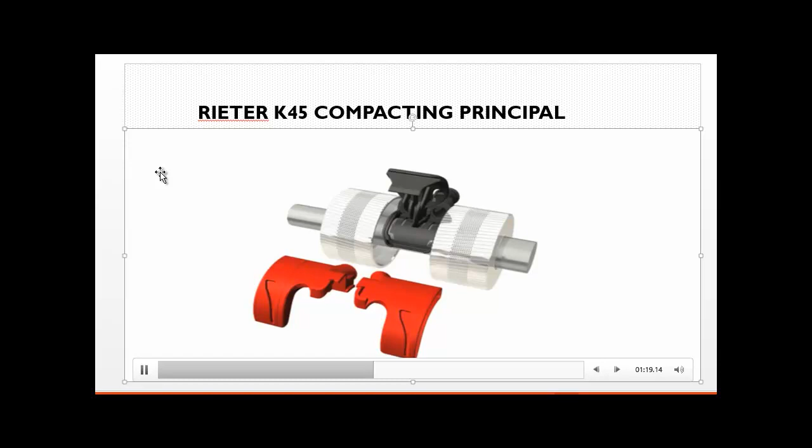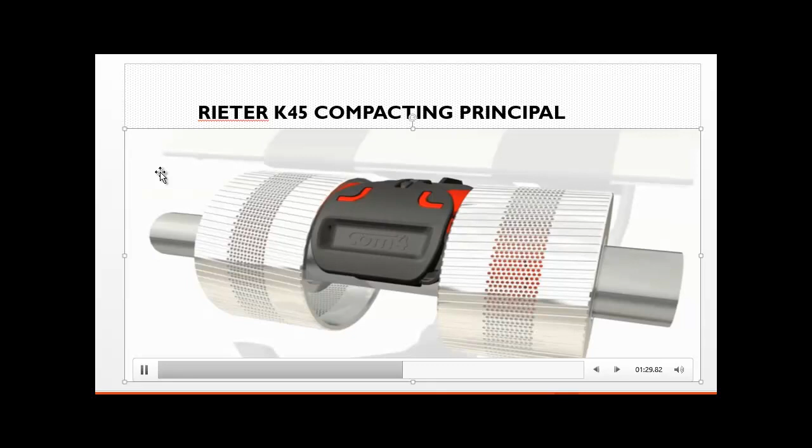Here you can see the air guide element, drafting zone. So here it is very good, the system showing the roving is coming into the drafting zone, and then on the perforated drum you can see here a small fiber is going inside.

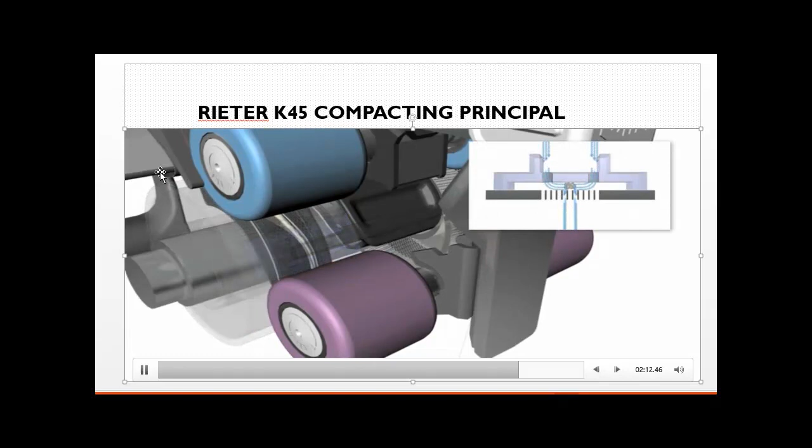Basically, if you can see, the compact yarn disadvantage is the cost is higher for the attachment. Maintenance is required because there is a chance of choking the suction tube, and consumption of energy is higher because of the suction of the fibers. Otherwise, yes, it is an excellent system. Compact yarn is highly used in industry right now, in denim also.

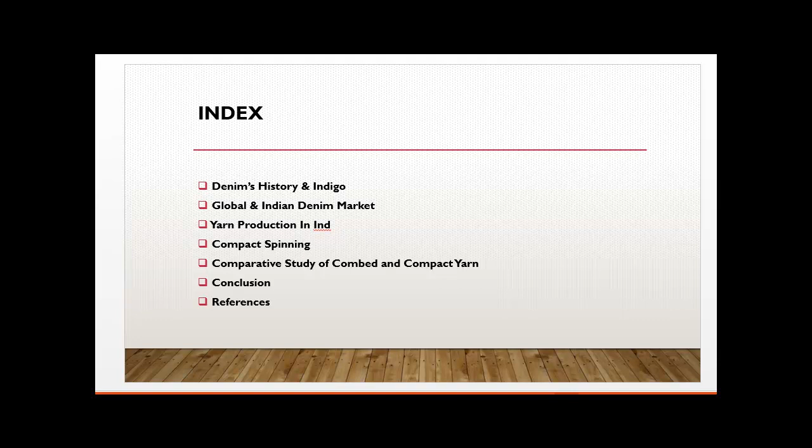Let's first see the denim history and indigo. So I have given here some story for the denim and indigo jeans. The story of jeans began in the mid 19th century simultaneously in two European cities, Nimes in France, where the fabric itself was created, so-called Serge de Nimes, which led to the name of denim. People ask me why the name comes denim - it's because of Serge de Nimes. The name was combined and it became denim.

Genoa in Italy, where the color comes from, called in French bleu de Genes, which led to express blue jeans. The fabric and color came together to become the jeans denim.

Denim is a strong cotton fabric made using a twill weave, which creates a subtle diagonal ribs pattern. The cotton twill fabric is warp facing, meaning that the weft thread goes under two or more warp threads, and the warp yarns are more prominent on the right side.

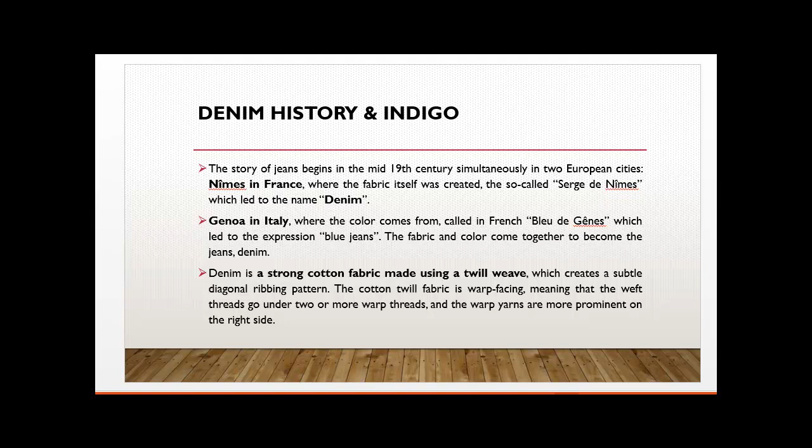Indigo popularity for denim - the indigo color is the principal source of the almost magical appeal of denim. The indigo imparts a brilliant blue hue on the fabric. Indigo is unique in its ability to impart surface color due to partial penetration in the cotton fiber.

When the cotton yarn dyed with indigo is untwisted, it can be seen that the inner layer remains uncolored. This, I call, is the beauty of indigo dyeing, because the color of indigo does not penetrate up to the core of the yarn. It will be a layer on the yarn. When you cut the cross section of the yarn, you will easily find the whiteness inside the core, which means it is not penetrated inside the yarn.

Another important feature of indigo is, unlike many other dyes, indigo dyed denim does not pose a health hazard. In fact indigo is so safe for living things that it has long been used for coloring medical sutures. Indigo is also used as a food color and as a medical indicator applied intravenously.

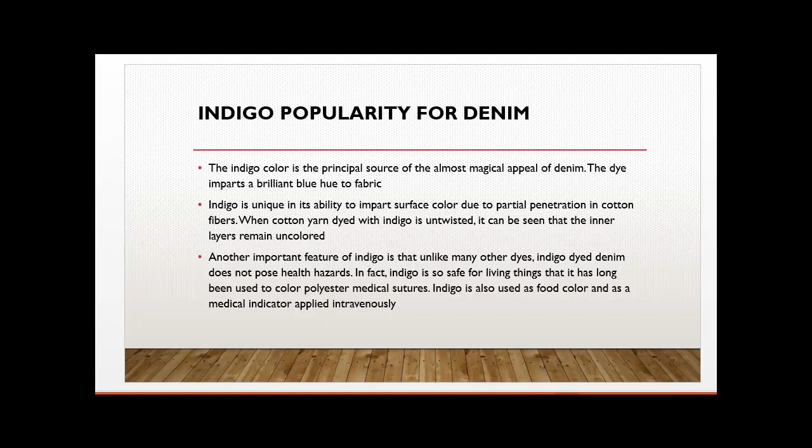Global and Indian denim market. Global market of denim apparel is expected to grow from 75 billion USD in 2019 to USD 90 billion by 2024, at a CAGR of 4%.

Menswear accounted for the largest market share of 55% in 2019. Women's wear segment is expected to register the fastest growth of CAGR 5% from 2019 to 2024. So there is a good chance in the women wear segment, basically in fabric as well as apparel.

We can use recycled denim jeans for denim yarn spinning, which is a sustainable practice. We can even buy the jeans, garnett it, and make a fiber. This fiber can be used in spinning, and we can make a yarn, which is really a recycled denim jeans - we can make recycled denim jeans.

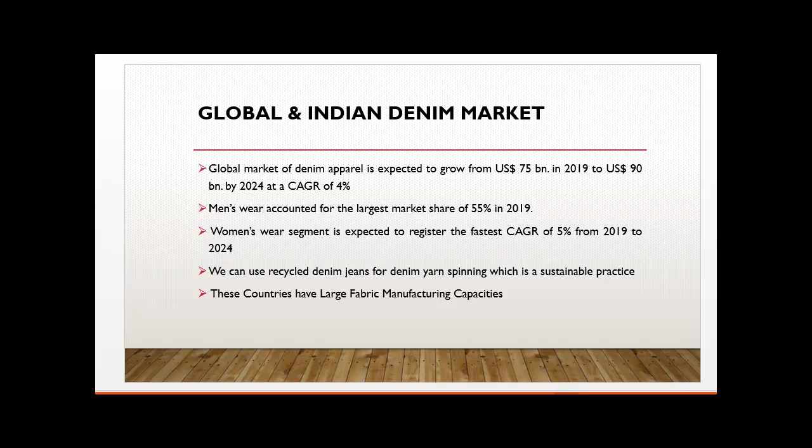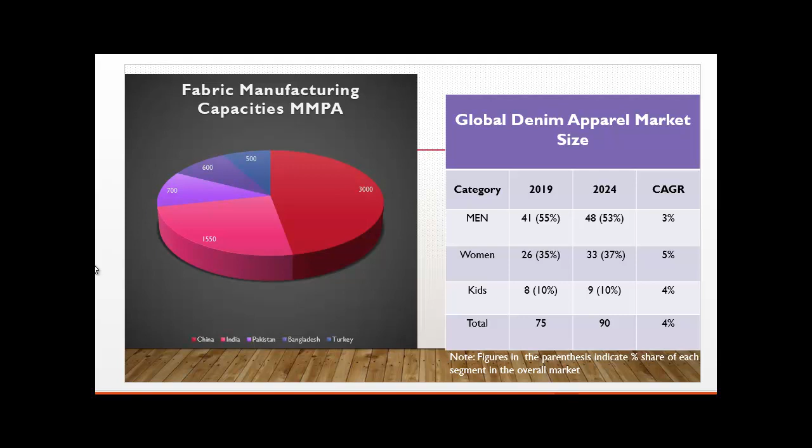Even the global denim apparel market size for men's is 55%, in 2024 it is 53%, so CAGR will be 3 to 4%. Women's is 5%, kids is 4%, and total is coming around 4%.

I would also like to show you here the Indian denim apparel market. Denim market size in India - if you can see 2014, 2019 and 2024 - CAGR is moving at 9% rupee-wise. Consumption of denim apparel is moving at 5%. This chart is showing a clear picture about the Indian denim apparel market.

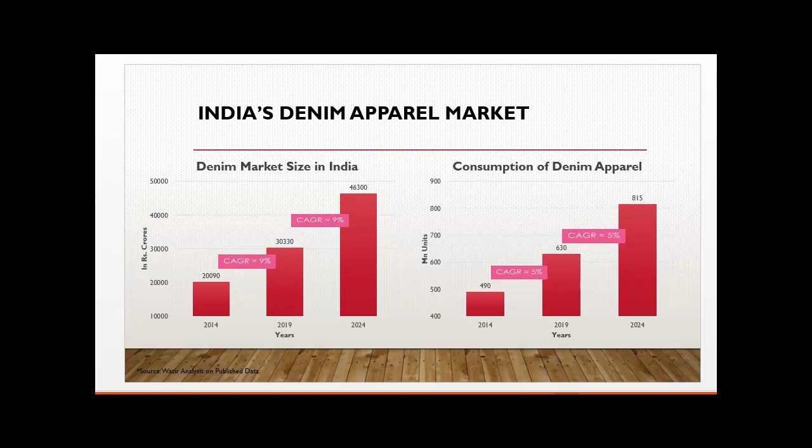Now the question is coming: what is the global buyer thinking about China, India, Pakistan, Bangladesh and Turkey, related to positioning of key nations?

For different parameters here, sky blue is showing high, medium is purple, and low is red. So if you see, China is number one right now for denim fabric in quality, cost competitiveness, product variety, product innovation, services, integrated setup, washing and finishing, compliance and sustainability.

Here in India, the denim fabric has some limitations for product development. If you can see the red area, service orientation and integrated setup. The integrated setup is very less in India, starting from spinning to garmenting, whereas China has a fully integrated setup, so India has a lower ranking in that part. Product innovation and service orientation is also a lower rating.

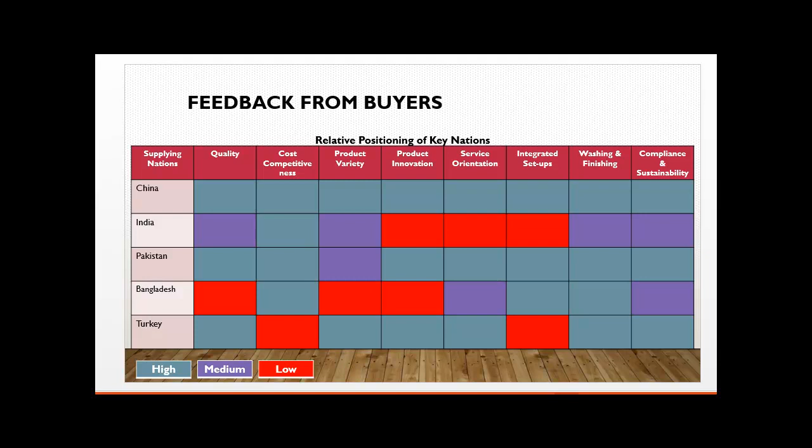Now let us see about the yarn production in India. Production of yarn in India was nearly 5 billion kilograms in fiscal year 2019. The volume of yarn produced had consistently increased since fiscal year 2011. Cotton yarn was the largest share of the yarn variety at over 71% of market share, with fabric production share of nearly 51.4% in fiscal year 2018.

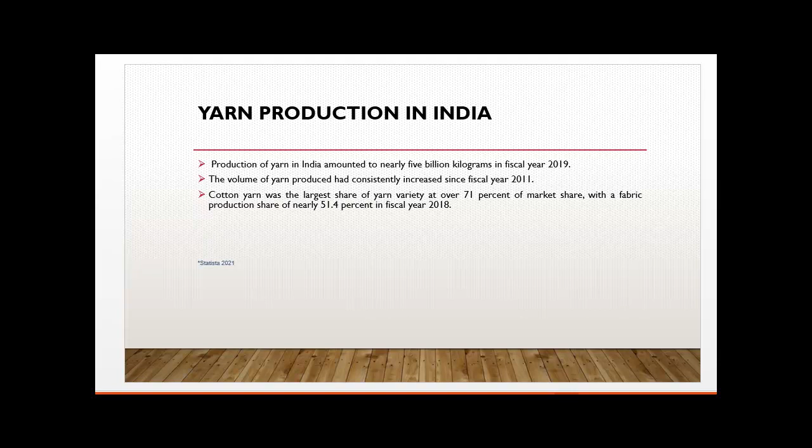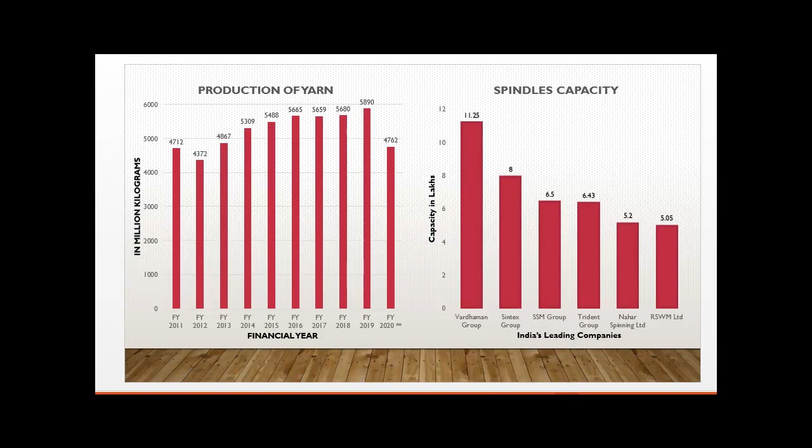I would like to share with you about the production of yarn and spindle capacity. From 2011 to 2019, there was growth in production. In 2020, because of the corona pandemic, there was a reduction, but after this corona wave, India is now booming in spinning and yarn production, with many capacities coming up with new projects. Still, if you see the spindle capacity, number one is Vardhaman, with 11.25 lakh spindles. Next is Sintex Group, then SSM Group, Trident Group, Nahar Group, and RSWM Group. So this is about the spindle capacity.

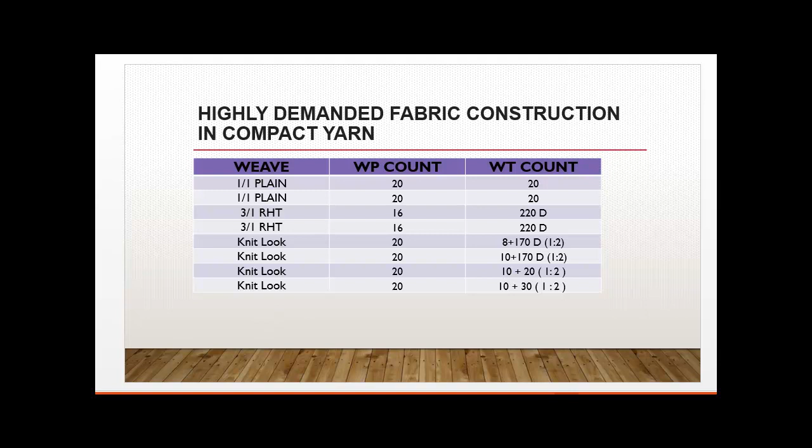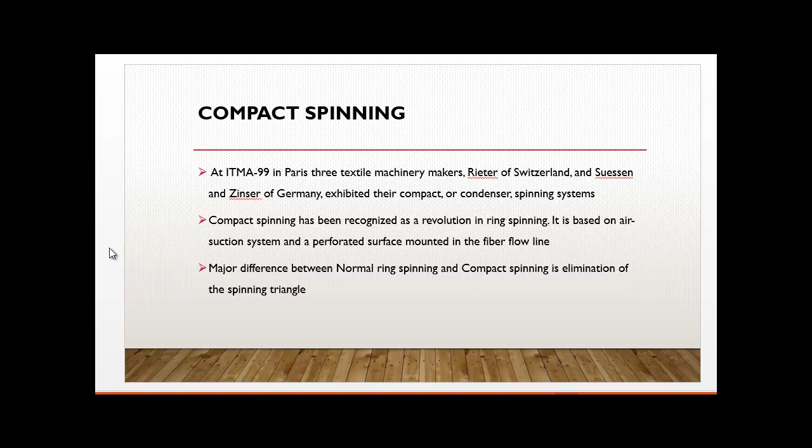Now let's see about compact spinning. At ITMA 99, three textile manufacturers came up with this technology: Rieter from Switzerland, Suessen, and Zinser from Germany. Compact spinning has been recognized as a revolution in ring spinning. It is based on an air suction system and a perforated surface mounted in the fiber flow line. The major difference between normal ring spinning and compact spinning is the elimination of the spinning triangle.

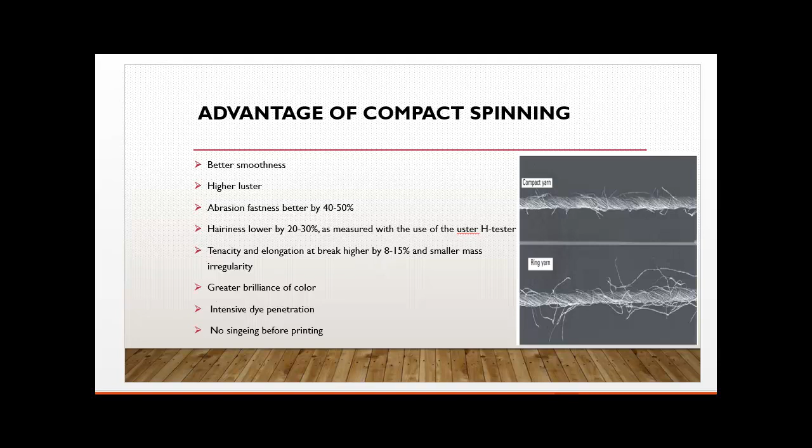Now let us talk about the advantages of compact yarn. If you see the photograph here of compact yarn versus ring yarn, you can see a substantial difference. The advantages are better smoothness, higher luster, abrasion fastness better by 40 to 50%, hairiness lower by 20 to 30% as measured by the Uster tester, tenacity and elongation at break higher by 8 to 15%, and smaller mass irregularity. Greater brilliance of color, intensive dye penetration, no singeing before printing. So really a revolution in spinning.

Now if you can see the spinning triangle comparison: without the compact attachment and with the compact attachment, there is a huge difference in sliver width, with many protrusion fibers coming out in the normal case, whereas with compact attachment it's very smooth and the triangle is very small. So this is the comparison of compact yarn during manufacturing.

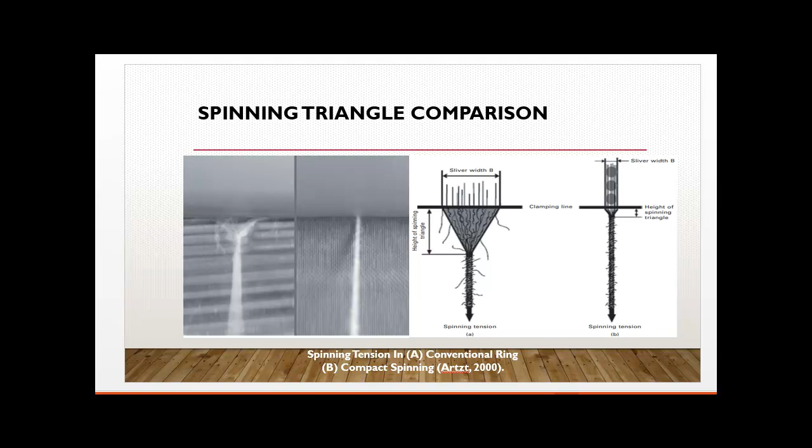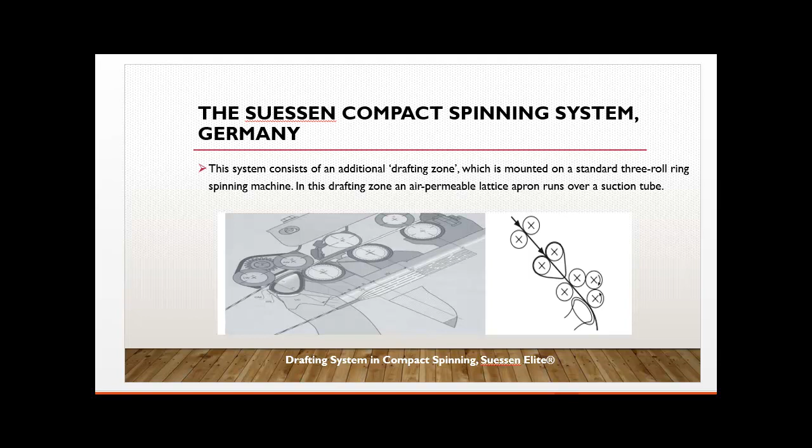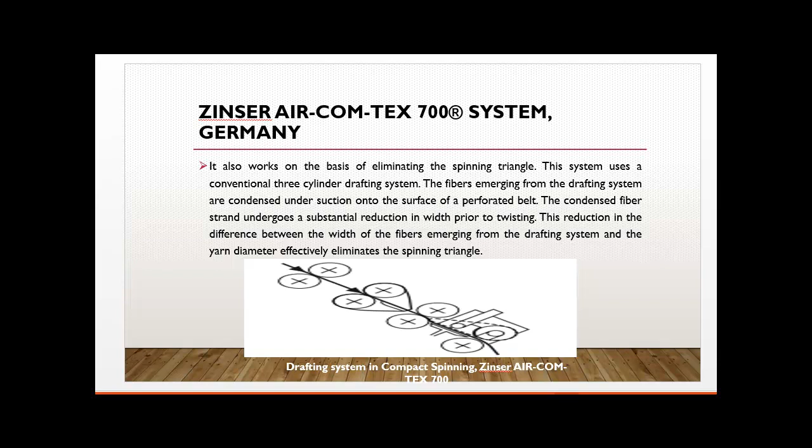Now let us talk about various compact spinning systems. One is Suessen - basically all three companies use an aerodynamic principle for compact spinning, so I won't go into all the details. Zinser came up with the Air-Com-Tex 700 system from Germany, and Rieter has the K44 ComforSpin from Switzerland. Here you can see there is a perforated drum, this is the drum, this is the drafting zone, then the suction system, here is the bottom roller, this is the top roller, number 5 is the nip roller, and number 6 is the air guide element. So when the sliver is coming through...

After the drafted fiber ribbon passes the main drafting zone, aerodynamic forces are used to laterally condense the drafted fiber ribbon. As a result, the spinning triangle becomes so small that it is almost eliminated. Here you can see after drafting, the fiber comes into this perforated drum, and small fibers come inside, going into the tube suction system, so the loose fibers come out.

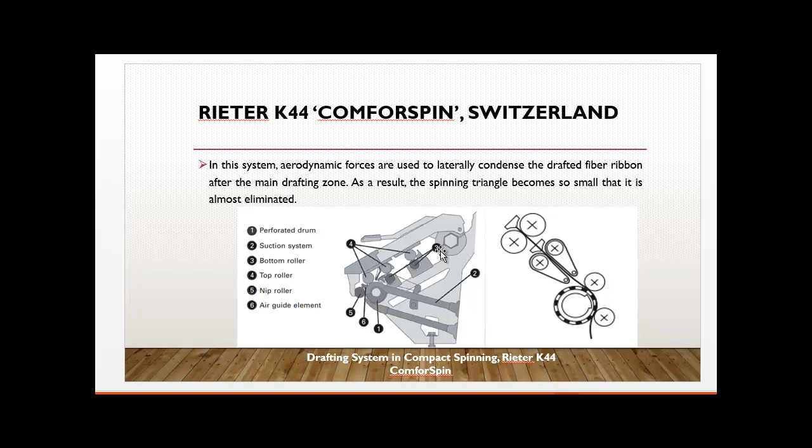Now let us see a small video of the Rieter K45 compact principle. This will give you a very good idea of compact spinning.

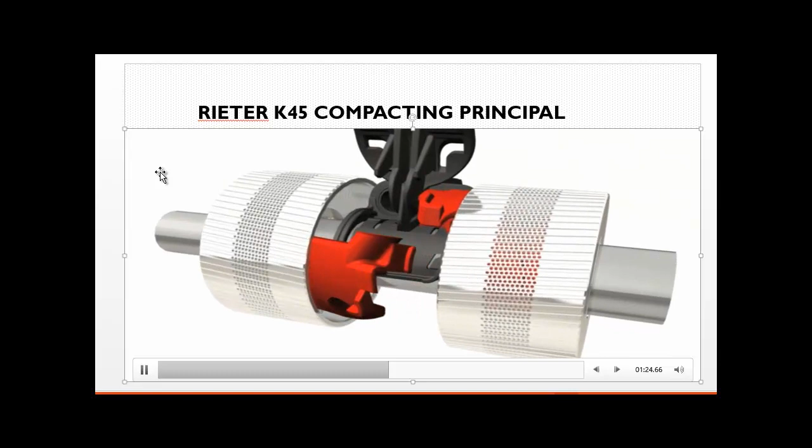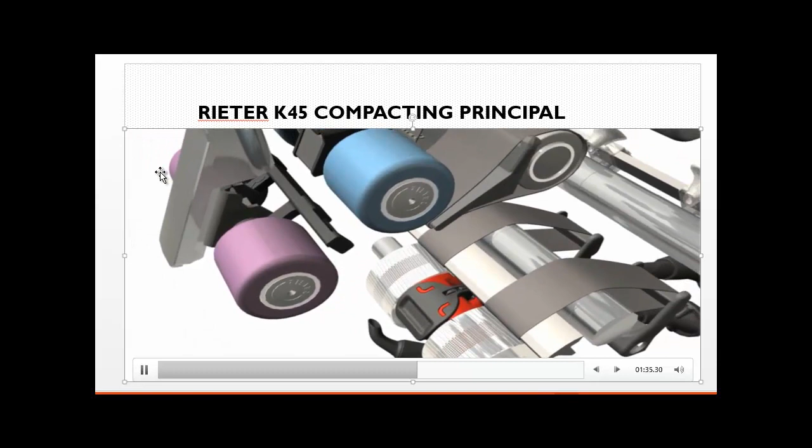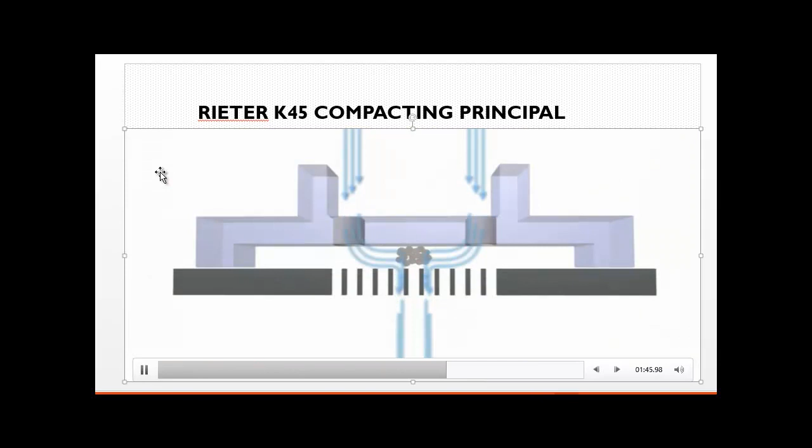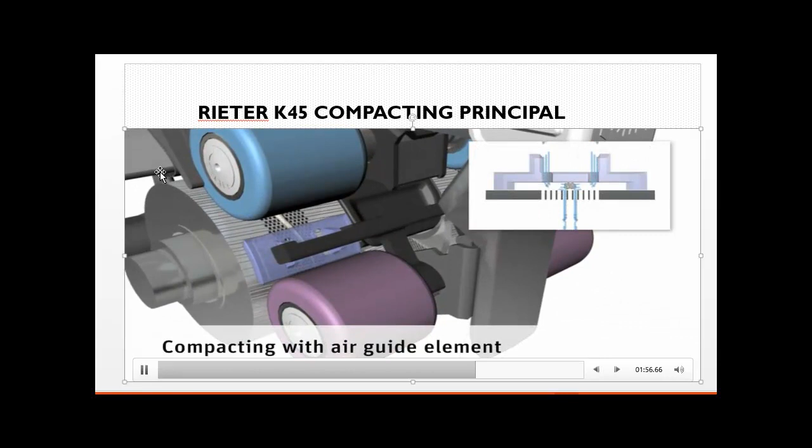Here you can see the air guide element, drafting zone. So here it is very good system showing roving is coming into the drafting zone, and then on the perforated drum you can see here there is a small fiber going inside.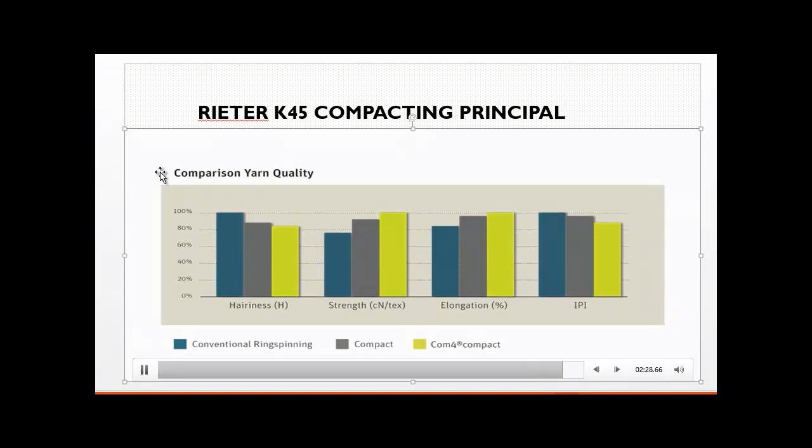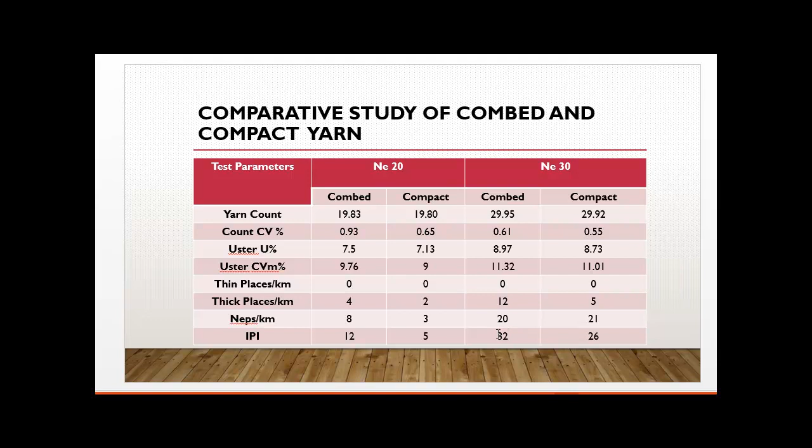Now let us see the comparison study also about the 20s and 30s yarn. You can see here huge difference between the IPI level. The combed is 12, whereas compact is 5. In 30s yarn, if you see the IPI, 32 and 26, same way.

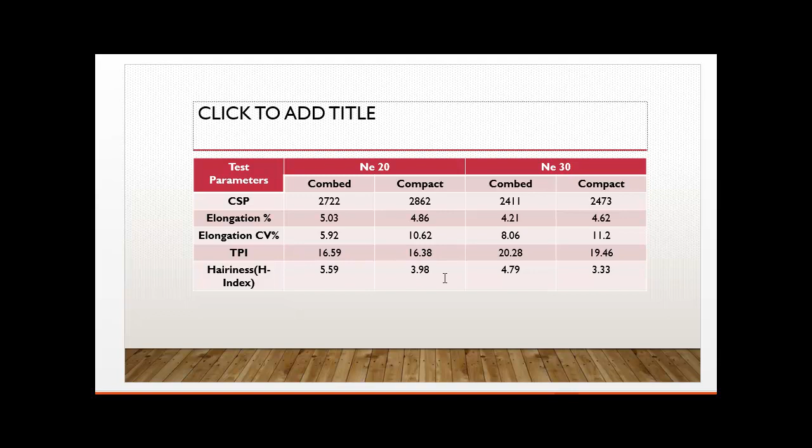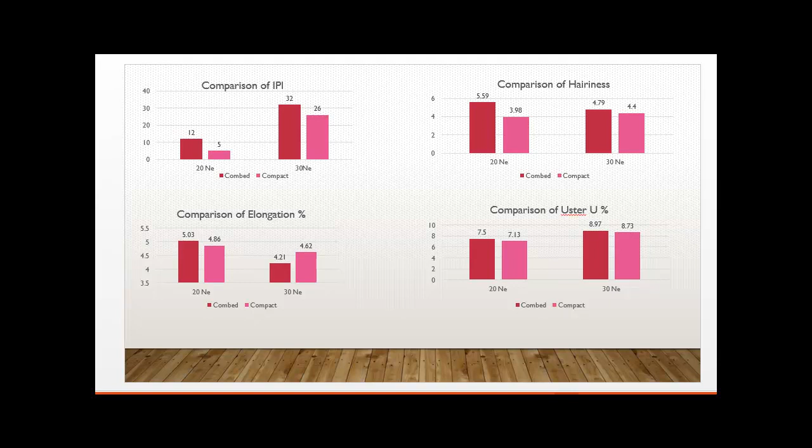CSP is also increasing from 2722 to 2862, and in count 30s, combed is 2411 to 2473, and hairiness, if you can see, 5.59 to 3.98, 4.79 to 3.33. You can see the comparison with the graphical representations, IPI, hairiness, elongation and Uster percentage.

Basically, if you can see, the compact yarn disadvantage is the cost is higher for the attachment. Maintenance is required because there is a chance of choking the suction tube, and consumption of energy is higher because of the suction of the fibers. Otherwise, yes, it is an excellent system. Compact yarn is highly used in industry right now, in denim also.

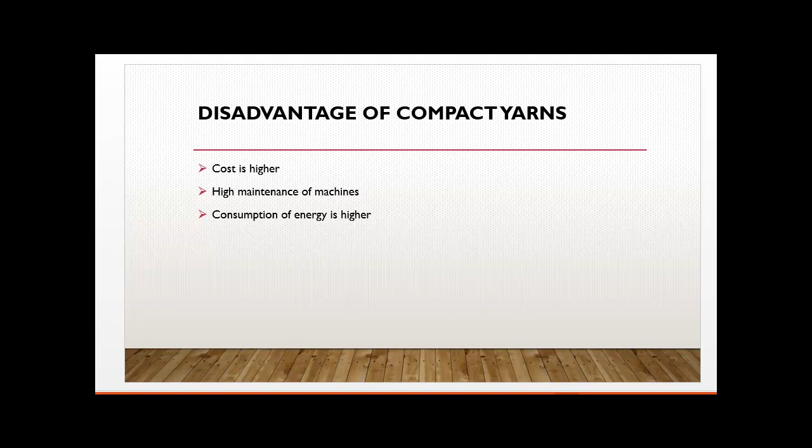So the conclusion is the overall properties have been improved in compact yarn. Compact yarn is highly suitable for shirting purpose, because in a coarser count it is not suitable due to higher hairiness already present. So the reduction with compact yarn is not much substantial in the coarser count. Secondly, because of the higher hairiness and the small length fiber being higher in the coarser count, it chokes the compact yarn system.

So basically compact yarn is preferable from above 20s, and that's why it is more useful in shirting fabric. In denim mainly coarser yarn has been used, but use of compact yarn is increasing in knit weave denim and shirting denim yarn fabric. From the view of cost, it is slightly higher than normal spinning and also requires higher maintenance of the machine.

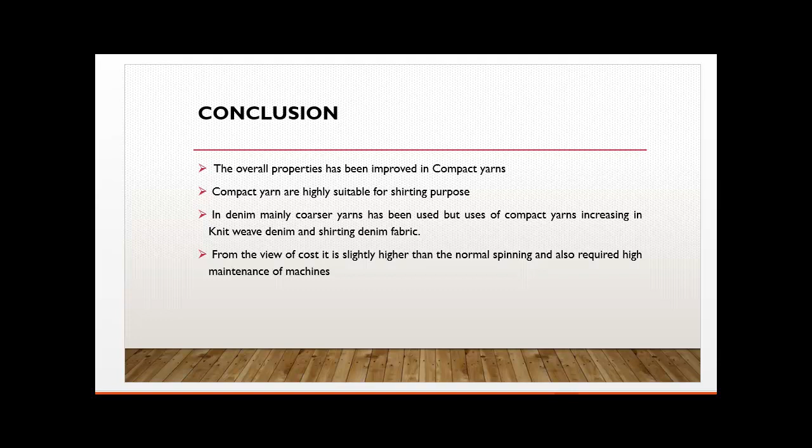Now we have taken various innovative trials in the spinning area which I want to share with you. One trial we have taken is a compact attachment fitted on the speed frame, to remove the protruding fiber from the speed frame itself instead of the ring frame. This was a very successful trial, and it is partially like a comber type of system, because we fitted such a compact attachment on the speed frame, and the yarn we made was just like a combed yarn.

Second, we have taken a trial on open end yarn in the ring frame. What we have done is make a low twisted open end yarn and then run it on the ring frame in place of roving supply, to convert open end yarn into ring yarn. This is a really excellent experience we have got from the trial to run open end yarn with low twist on the ring frame.